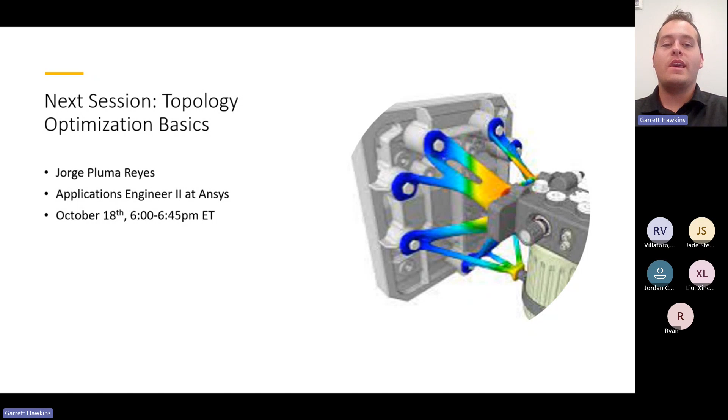So why the competition? Why are we doing the competition? A little bit of background about Building AM: we are a not-for-profit organization based out of Utah. Our mission is to teach people about 3D printing, help introduce them to it, help them find networks within 3D printing, and get them used to using it.

The competition kind of stemmed out of me and one of the other board members, who is a professor at UVU. I recently graduated with a degree in mechanical engineering a couple years back from BYU. And when I graduated, you sit down with the career counselor, they ask you, what kind of job do you want to have? And I wanted to do 3D printing.

The challenge was that in the metal and industrial 3D printing world, I didn't have any experience. So I applied with a bunch of OEMs. I really struggled, and eventually I ended up landing this job at Optisys that I've loved. It's given me a lot of opportunities to learn about 3D printing. So the competition is our way of giving back to you, the students, and hopefully helping you to have a better job finding experience in 3D printing than we did.

A couple pictures here on the slides. It's because 3D printing is a tool, right? And if you're like me, you've got a big toolbox at your house. If you don't know how to use a tool, it really doesn't do you any good. So we're here to teach you about this tool. We want you to experience the tool through designing this drone. We want you to have experience designing for additive manufacturing and knowing the basics about additive manufacturing, so when you enter the workforce, you're already a leg up ahead of everyone else.

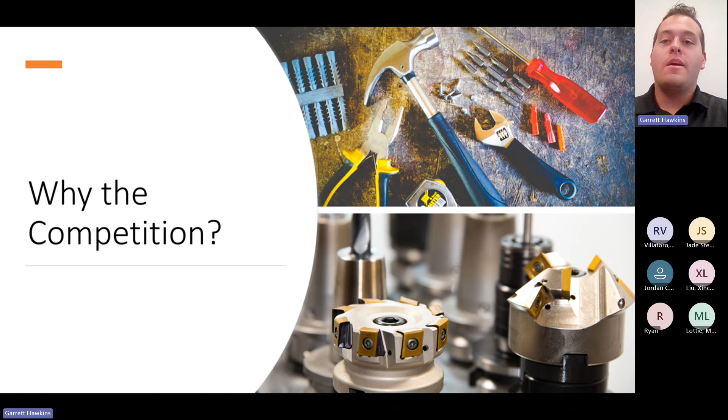I've included these CNC tools down here as well. As we at Optisys can tell you, if you don't know a tool exists, you may be doing it the harder way or the wrong way, and you may be scrapping parts because of that. But if you know the right tool and you know how to use it, then you can do some really cool things. So that's kind of the point of the competition.

So I want to walk through how parts are manufactured, and you guys may be familiar with this already, but a brief overview. A lot of times in an ideal world, you will identify a customer need, you'll make a design, you'll manufacture it, and you'll deliver it to that customer.

And if you know exactly what the customer wants, this is really nice because you can design exactly that, you can mass produce it, you can get it in their hands. One of the challenges, though, is what if customer needs have changed by the time you actually get to deliver it? Design and manufacturing is not a terribly fast process, it can take even years to do. And so if customer needs change in that time, then you're delivering a product that nobody wants anymore.

The other challenge is what if someone else beats you to market? In industry, very rarely are ideas super original. And so if someone else beats you to market, then you just lost out on a lot of sales.

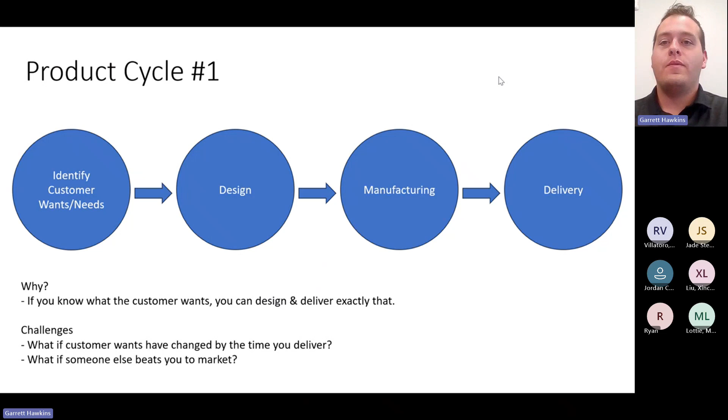So then we get to this other product cycle. In an ideal world, we could design, we could manufacture, we could deliver, and it will meet the customer needs. We can deliver the product that the customer wants when they want it. But the challenge here is it's a bit like guessing. You have to kind of guess what the customer is going to want months and even years down the road and manufacture it to meet that.

And what if you guess wrong, right? Now you're stuck with lots of units that you can't sell because no one wants it.

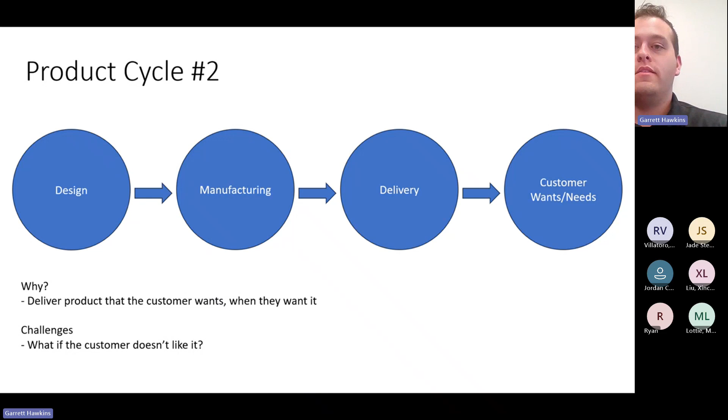So what I would suggest is maybe the ideal product cycle is you design, you do small batch manufacturing, you deliver, you analyze whether or not you're actually meeting the customer needs, and then you do it all over again. And this is kind of where 3D printing really fits in, because you can go from design to manufacturing in as little as a day instead of months.

And we've done that here at Optisys. We've taken designs that were just ideas at the beginning of the day, and we'll design it up, we'll do some review, and we'll do the actual 3D printing of it. And when we come in the next morning, we have product that we can pull off and we can sell.

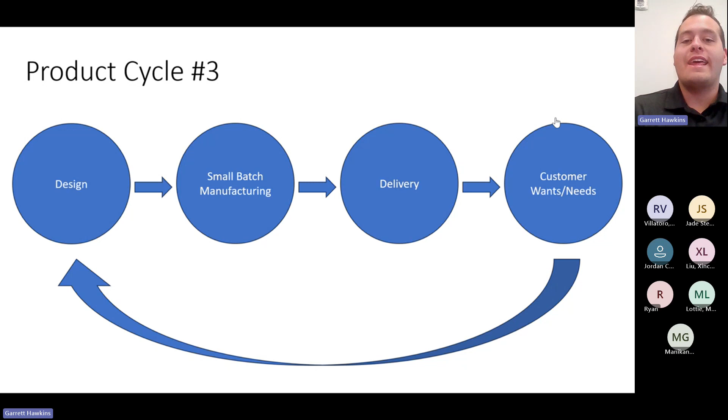And so this allows you to be a lot more agile to what the customer needs. You're not investing in expensive molds for manufacturing. You can come up with an idea and get it to market fast so you know if it's going to be successful or not. And then you can go back and make tweaks. And as you continue to mature and grow your product, then you can move to injection molding or die casting or one of the more traditional manufacturing methods.

Why doesn't everyone use 3D printing? Garrett, you're making 3D printing sound super cool. Why doesn't everyone use it every time?

Machines are really expensive, especially when you get into the metal world. Some of the bigger 3D printers, like the ones we have here at Optisys, cost in the millions of dollars, multiples of millions of dollars. And if you go for some of the machines that have even more features, you're talking 10 plus million to be able to run these machines. Some of these metal machines are so expensive that the companies that make them don't even sell them. They just sell the printing services because no one would be able to afford the machines.

So they're really expensive. And part of the challenge is design and operation aren't really taught in school very often. Laser powder bed fusion, SLS, those are two of the less common technologies to be taught in schools. And so when the workforce gets to the workplace, they don't really know how to use these big expensive machines. Sometimes we've seen that they can be really expensive paperweights.

The other challenge with using 3D printing is that the cost per part doesn't tend to drop very much with quantity. When you're doing a process like injection molding, the more parts you make, the lower your per part cost gets. You have a really high initial cost of making a mold, and then each part you make after that is really inexpensive. So the more parts you make, the lower the cost per part is.

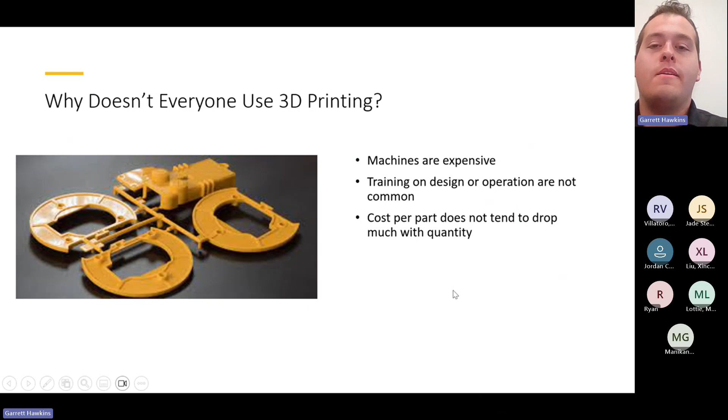But what is it really good for? Initial product and small runs. I've got this picture of these pens down here. There's a company that I'm good friends with called Merit 3D. They specialize in reshoring parts that are typically made outside this country, and customized parts that are mass manufacturable using additive manufacturing. And they're doing a job right now for a bank here in Utah that's celebrating their 150th anniversary.

They want these special pens to give out at their branches to celebrate this 150th anniversary. And it isn't really practical for them to invest in molds to make these pens just for this one year that they want to give those out. 3D printing is an amazing technology for that because it's completely customized to them, and they're really not printing all that many in the year. So they don't have to make those expensive investments in molds and stuff.

Customization is a huge thing as well. You can see on the pens that it's customized to this year. There are companies, I believe Gillette, 3D printing razor handles in the color and texture you want. There are shoes being 3D printed. Prosthetics are a big thing right now, being 3D printed and customized to individuals' bodies.

Consolidation is another wonderful thing. Part-to-part cost, 3D printing will almost always lose. But if you can take 30 parts and make them into one, now you're being cost competitive, because you're not paying for 30 parts and the connecting and touch time to connect it. You're paying for one part that can be produced at once.

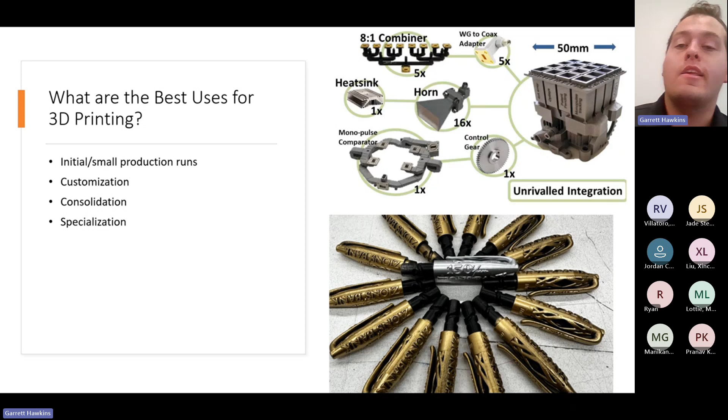The other thing is specialization. Another thing that Optisys is really good at is we service antennas that no one else can make, across wide frequency bands in the RF space. We're able to specialize these antennas to cross bands that no one else can do, that would otherwise need 5 or 6 antennas to meet.

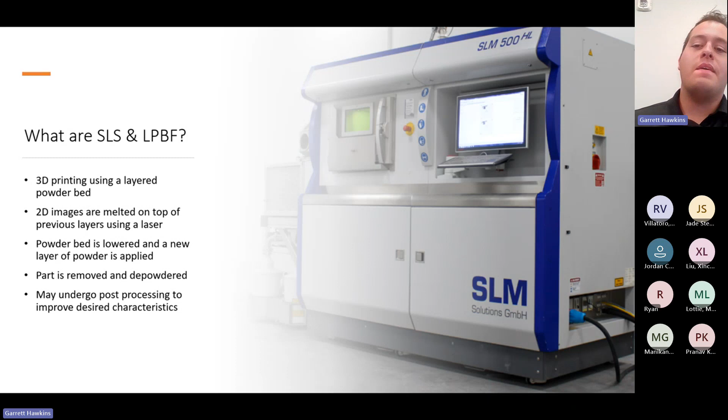So what are SLS and LPBF? Like I said, these aren't covered very often in school. They're kind of rarer, but they are both powder bed processes. Basically, 2D images are melted on top of previous layers using a laser. The powder bed is lowered, a new layer of powder is applied, the part is removed, it's depowdered, and it may undergo post-processing to improve desired characteristics.

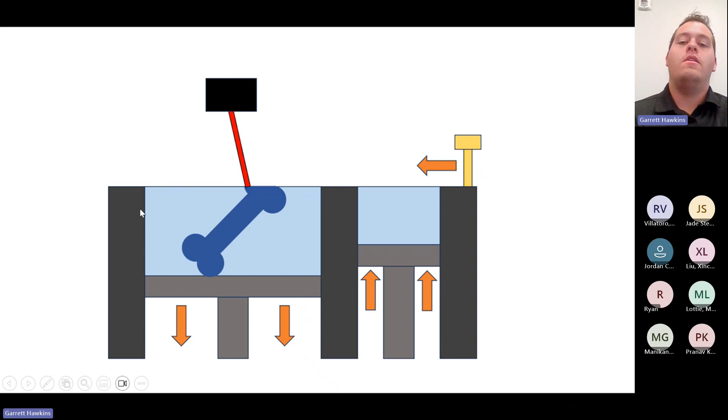The build plate then drops down. Over here on the right, our powder feed bed is going to raise up a little bit, and our yellow recoater here is going to come across and wipe the powder across the new layer of the printer. This is pretty similar between laser powder bed fusion and SLS.

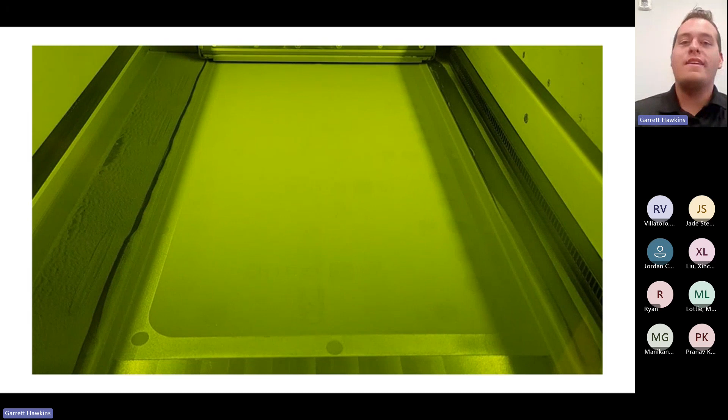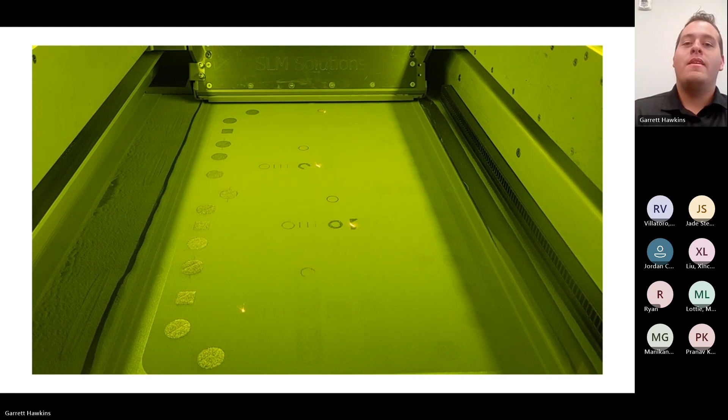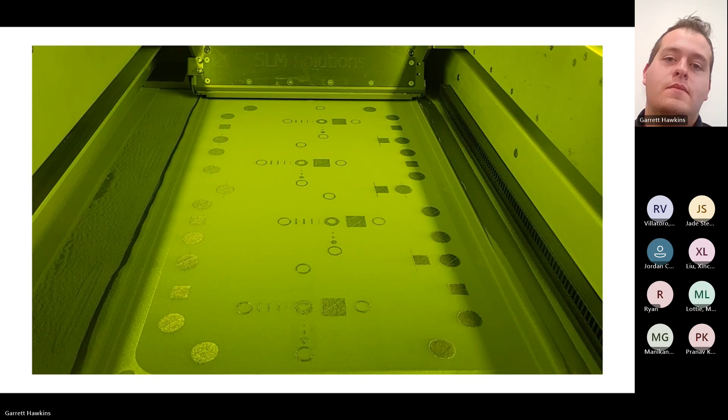Here's a video I took of one of our printers actually printing. I could sit here and watch for hours the lasers actually running. You saw the recoater come across, laying the bed of powder. This particular machine has 4 lasers that are coming across and doing these 2D images of the part that's being produced. Once it finishes this, it's going to pull the recoater across again, and do it all over again. It does this hundreds or thousands of times for a tall part, over and over again.

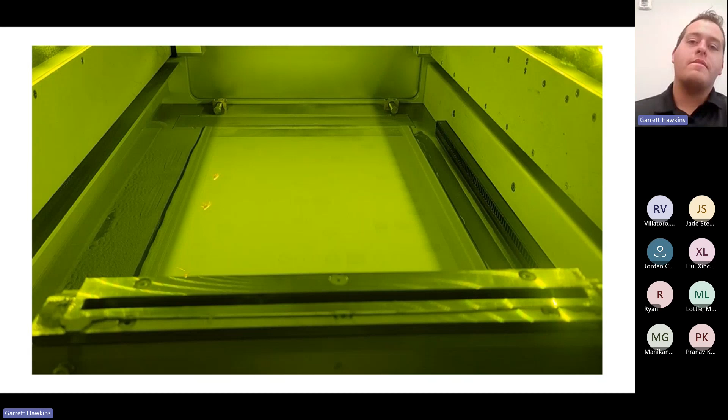Essentially, it's a micro welding process.

So what are the similarities between SLS and LPBF? Both use roughly the same size powder. The powder fed into our machines here at Optisys is roughly 20 to 60 microns. SLS is a little bit bigger, it can be anywhere from 20 to 100 microns. But overall, really small powder.

Both are limited in design by what you can get the powder out of. We can print some really complex antennas, but one of the biggest challenges we have is getting the powder out of the antennas, because if we leave the powder in, it doesn't work very well.

Both of these processes produce end-use ready parts with minimal need for post-processing. As soon as these parts come off the printer, you can do a little bit of post-processing and they're ready to ship out to the customer.

The really cool thing, where it kind of differs from CNC machining, is that the used powder can be reused. You can see here in the powder bed, a lot of it isn't part. That powder that's not being used, we collect, sieve out the really big pieces and the parts we don't want, and then feed it back into the system to reuse on the next build.

And because of the small particles we work with, and sometimes the materials we work with, there's a lot of health and safety risks.

Right before this meeting, I was working on one of the printers, and it kind of looks like, if you've seen ET, the guys with the big hoods and jackets and the respirator tube going down—that's what I look like when I'm working on the machine. The aluminum is primarily what Optisys 3D prints in, and at this particle size it can be explosive, catch fire really easily, so it's a bit of a challenge to work with sometimes.

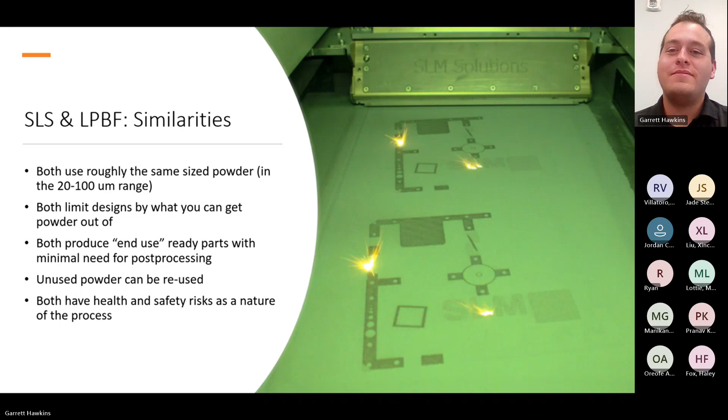Okay, so some of the differences between the processes: SLS primarily uses a thermoplastic powder like nylon, and LPBF uses metal powders like aluminum or Inconel. For this design competition, you're invited to design either for nylon with the SLS process or aluminum with the laser powder bed fusion process.

Supports are required for laser powder bed fusion, but often not for SLS prints, and that's a really big freedom that SLS offers. The reason is laser powder bed fusion works with much higher laser powers. The machines we run here at Optisys are 400-watt lasers, and there are 4 of them in our big machine, so temperatures get pretty high. In order to melt the metal, you obviously have to go much higher than you would to melt nylon.

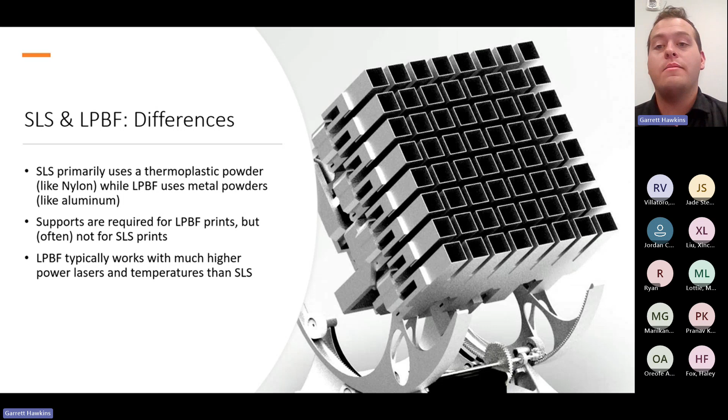So I wanted to give you a couple of our other mentorship sessions. We'll go over things to be careful of when you're designing for 3D printing with these processes. But as an additive process engineer, I wanted to go over a couple of the gotchas that I had to learn as I took on this job.

The first one is beware of sharp overhang corners. If you're familiar with FDM 3D printing, you know you can get away with up to a certain angle most of the time. For laser powder bed fusion and SLS, that's very similar. Where you run into challenges is with material shrinkage, especially with metals. Up here you can see this sharp corner—this is bad because it's very thin and very sharp. When your material hardens after it's been welded, it's going to cause that to curl up.

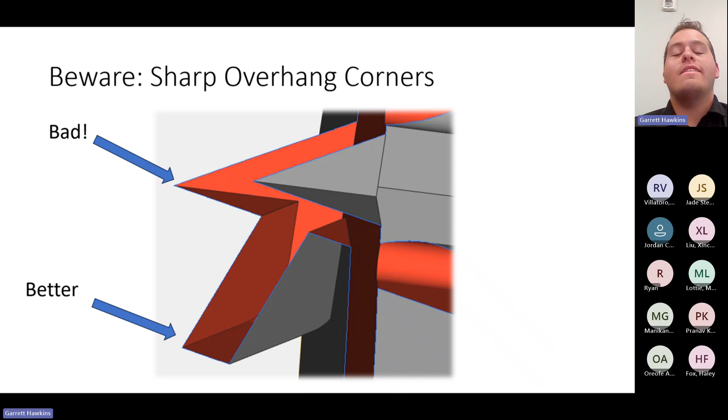And that can rip out your recoater blade. It can crash your build, and it's expensive and painful, and it really hurts your soul. A better way is this bottom option down here—you can see it's much thicker, it's going to resist curling a lot more. There's a much wider angle on the corners and a much broader surface overall. So just because your printer or your slicer says that's a really good angle, doesn't necessarily mean it's going to print really well.

Large flat surfaces can really be a pain as well. If you've worked with ABS and FDM 3D printing, you probably know this too, that it tends to lift off the build plate. Well, metal parts and plastic parts tend to do the same thing. If you're printing a really flat, really large surface, the forces cause it to curl up in what we call potato chipping. This is a business card I printed.

In fact, I've got it right here. It's really thin, about typical business card size. This was printed and even went through a heat treat process afterwards to relieve stress and hopefully allow it to stay straighter. You can see where this arrow is—it actually curled up at that corner and did what we call potato chipping. It ripped the supports. If you look down in this bottom diagram, when the forces get too strong, it'll actually rip that corner off the supports.

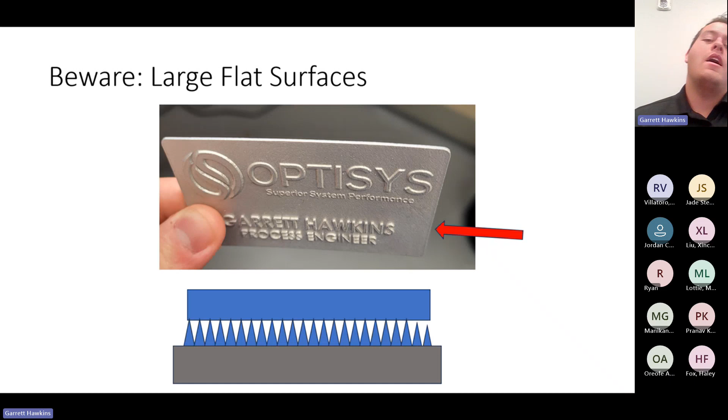And there are some things we can do as process engineers or additive engineers to mitigate that. We can throw some really heavy, solid supports on there, but the challenge is you're probably still going to get some warping, and they're a pain in the butt to pull off, especially in metal, when you're pulling off these big metal supports.

Beware of recoater walls. What do I mean by recoater wall? If you look at this equal sign I'm printing on the left, when the recoater comes across, it's going to hit that flat surface straight on, causing a big sudden force on your recoater. Sometimes that can cause your recoater to rip out. It can crash your build. It can be really bad.

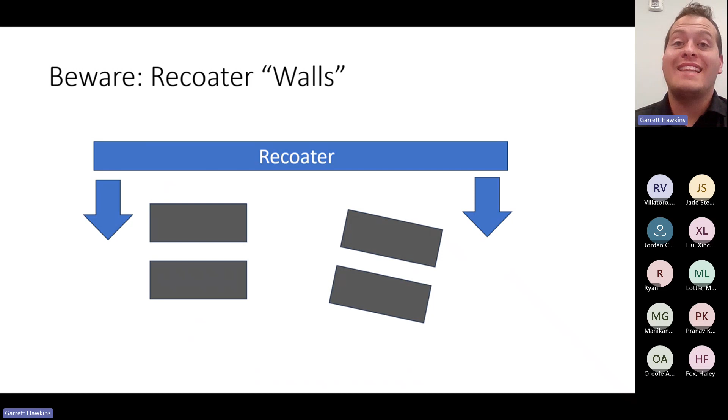Beware of parts appearing out of nowhere. If you've worked with FDM, you know that parts need to be anchored somehow, and it can really sneak up on you. It seems like common sense, but I can't tell you how many times I've been preparing files for print, and

I have someone review it, and they're like, this little part just appears out of nowhere. So if you look at this M, you wouldn't necessarily think, upon initial look, that the upper left part of the M is lower than the right part. It kind of looks like a big overhang. But if you zoom in, that part is actually lower. So if you're printing this in a powder bed process or any 3D printing process really, and you try and make it appear out of nowhere, it's not going to work very well. It may lift, it may move, it'll look really ugly if it does work out.

One of the challenges as well is how are your parts going to meet up together? If you look at these bottom examples here, these blue pointy things, there's a good and a better way to print it. The one on the left here, that may work just fine. We can put supports on the bottom, but our thermal expansion and contraction may make it so that that corner doesn't very much look like a corner anymore. It may look a little bit more rounded. It may have really rough surface finish.

Maybe a better way to print it would be to flip it upside down and let it build up into it instead of trying to connect to it. Same way over here. With circles and big holes and stuff, you have to be careful because the angle may look really good for 3D printing over here at the side, but when you get up to the middle here, it's almost flat. So sometimes we'll drop little supports here in the middle if we have to print in this orientation.

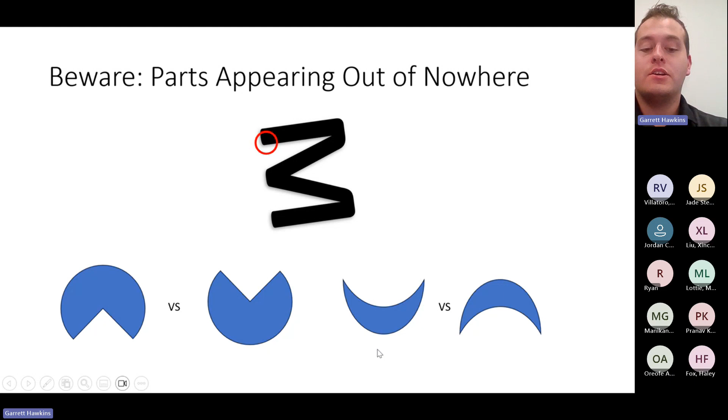Be aware of abrupt changes in XY profiles. Most of the materials that I'm aware of, if you change cross sections really fast, you're going to get some weird material things happening. With 3D printing, especially in the XY profile, you're going to get some weird things.

So on the right here is a part I just printed the other day. And you can see there's this big flat surface over here that immediately goes up into a thin fin. You can kind of see this witness line across where that happens. And it's because the thickness is changing so much, so it's shrinking different amounts.

It's being pulled differently. So if we look over here at the left with this plus sign here, this would cause witness lines at the top and the bottom of the wide section. So maybe a better 3D printing method would be if we rotated it slightly and we added some fillets. As you can see here, I dropped some orange lines to show that our thickness is almost consistent all the way across. And even when we do change thickness, it's happening very gradually. So we're going to avoid those witness lines.

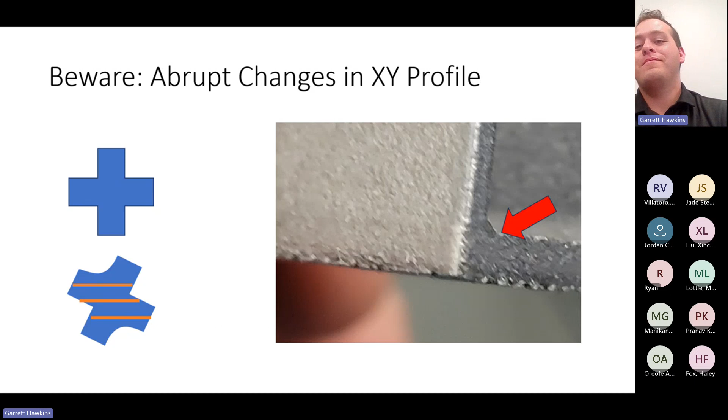Fillets and stuff like that are free in 3D printing, so use them. And if you've ever been in a CAD class or something, your CAD professor tells you don't over-fillet it. Throw that out the window for 3D printing. Fillets are free.

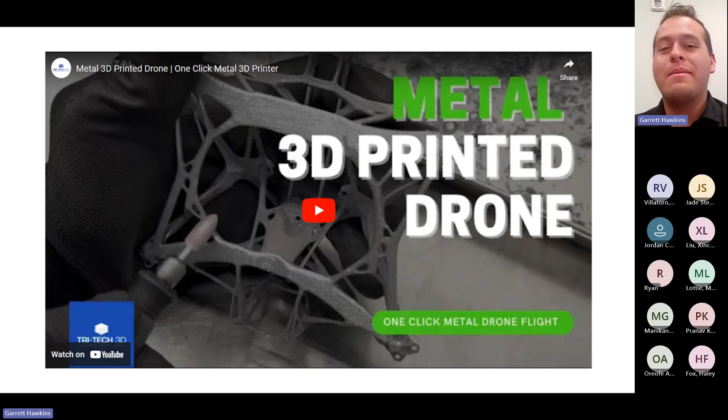A little bit of final inspiration for you. I stole this video from One Click Metal. They designed and 3D printed an aluminum drone that can hold about the same weight you guys are challenged to design for.

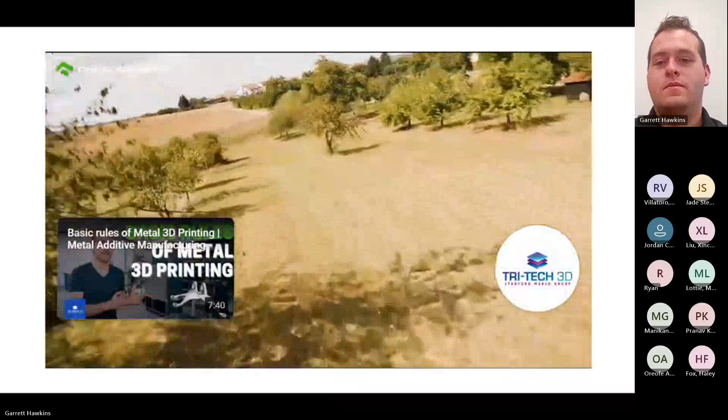So anyway, I thought that was really cool. They kind of did exactly what we're looking for you guys to do.